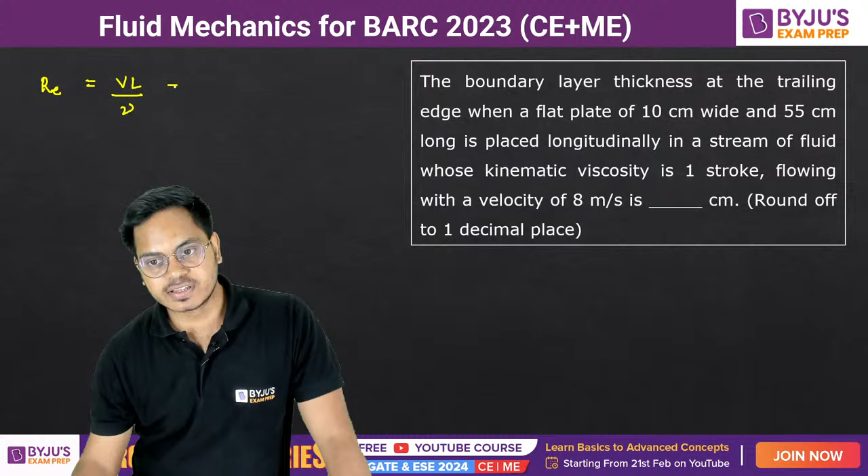It is going to be the velocity into length by kinematic viscosity. Everything is given to us. Velocity is 8 meter per second. Length of the plate is given to us and it is 55 centimeter, so 0.55 divided by kinematic viscosity, which is given to us as 1 stokes. 1 stokes means 10 raised to the power minus 4.

Now when you solve this, the Reynolds number value - ek baar aap mujhe comment box mein bata bhi sakte hain, otherwise I'll tell you it is 4.4 into 10 raised to the power 4. So this is the Reynolds number value. Achha, whether it is greater than or less than the critical Reynolds number. What is critical Reynolds number? Critical Reynolds number is 5 into 10 raised to the power 5. Definitely it is less than that. So we have a laminar boundary layer.

Good evening, Kiran. Now we know that for boundary layer, Blasius has given us the solution, that is delta by x is equals to 5 or 4.9, given in different books. Okay, in different books it is given different, no problem. Let's put the value here.

So delta is going to be 5 into x, which is nothing but 0.55. Put the value here as 0.55 divided by under root of the Reynolds number you calculated, that is 4.4 into 10 raised to the power 4. Put the value 4.4 into 10 raised to the power 4. When you calculate this, how much is the value of delta you guys are getting?

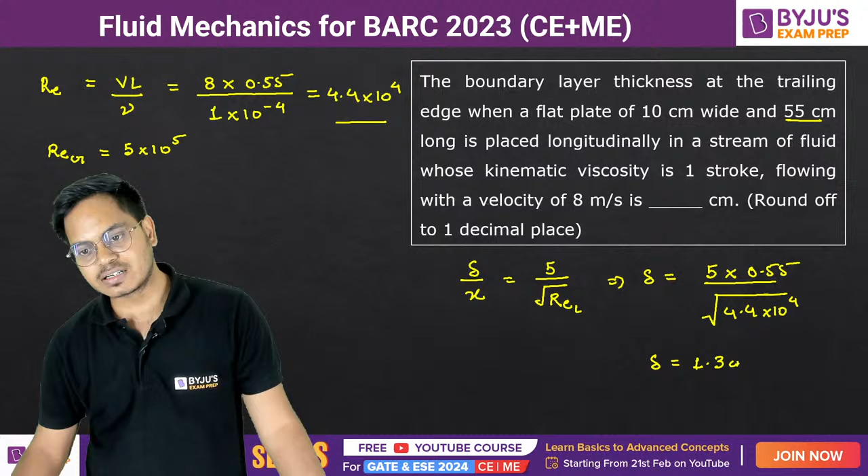Next question: the flow rate of water through the pipe in a fully developed flow through a pipe of diameter 160 mm, where the shear at wall is 78 Newton per meter square, is how much? They are asking us the discharge.

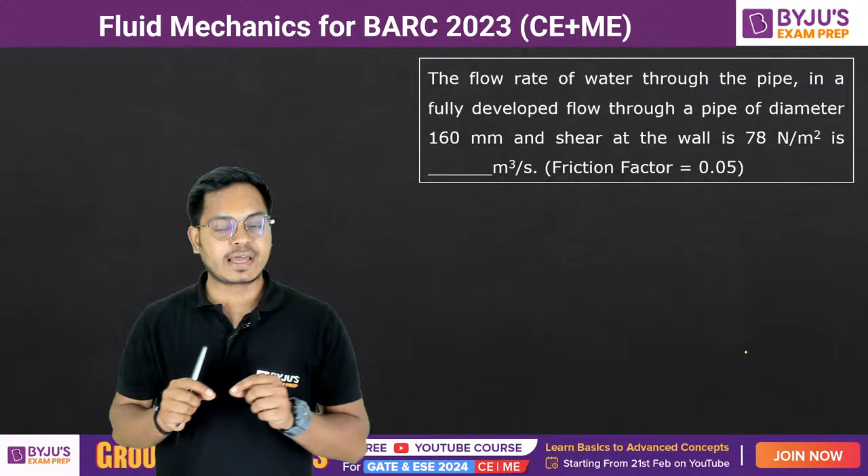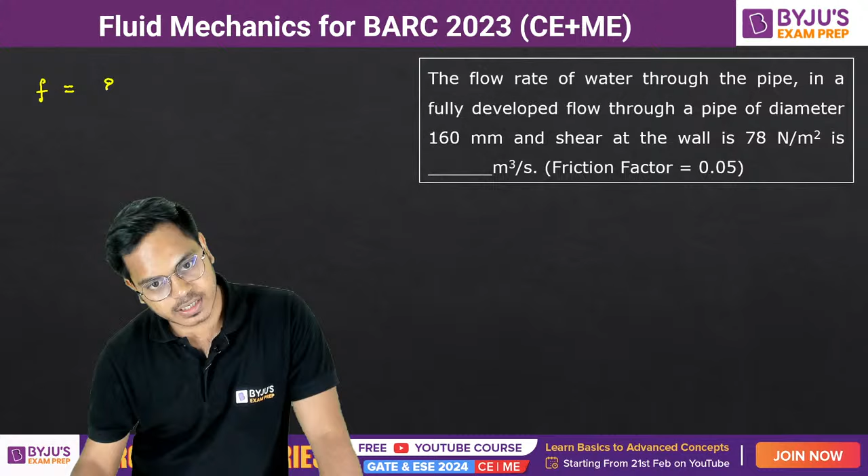So do I have anything, and friction factor is also given to me. Do I have any relationship between friction factor, velocity, and shear stress, that is shear at wall? Remember, there's a relationship I have discussed in classes a lot: friction factor equals 8 times wall shear divided by rho v square.

So from here we can find out the velocity. We have diameter, velocity, and discharge we can get. Let's find out the velocity from here, guys. So velocity is going to be 8 tau w by rho f, under root.

Kindly put the values here, see what you are getting. So 8 into 78. Density, what is it? This is water, so 1000. F is 0.05. How much is the velocity? Has anyone found it yet?

How much is the velocity, guys? Is it 3.532 meter per second? Super, once you have got the velocity...

Now we are good to go to find out the discharge. Discharge is nothing but area, cross-sectional area into velocity. Area is going to be pi by 4 d square. Dia is 160 mm, so 0.16 meter. Pi by 4 d square into velocity 3.532.

When you put the value, how much is the discharge? Who will tell me, Kiran? Tell me quickly, everybody answer. 0.071 meter cube per second. And what if they would have asked the same thing in liters?

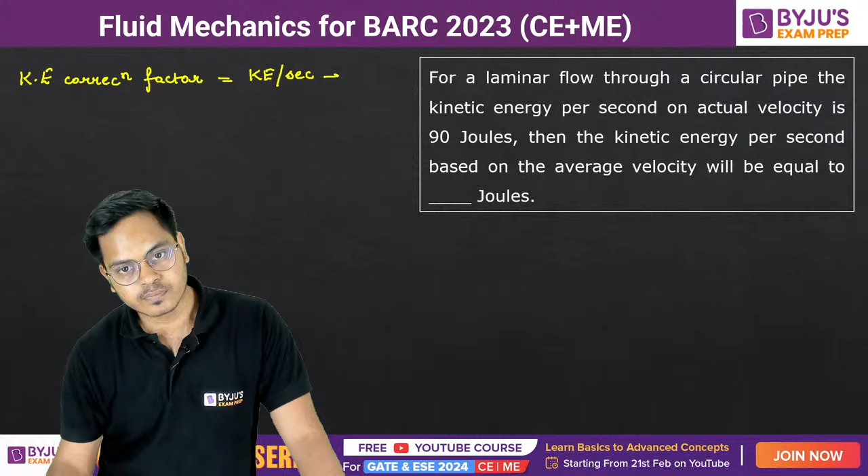So kinetic energy factor is how much for laminar flow, guys? That is going to be 2, equals to how much for actual velocity given? 90. And they're asking you this: kinetic energy per second corresponding to average velocity. So it is going to be 90 by 2, and that is 45 joules.

You guys are super. Anand, very good, brilliant. Right answer is 45 joules. Next question for you guys.

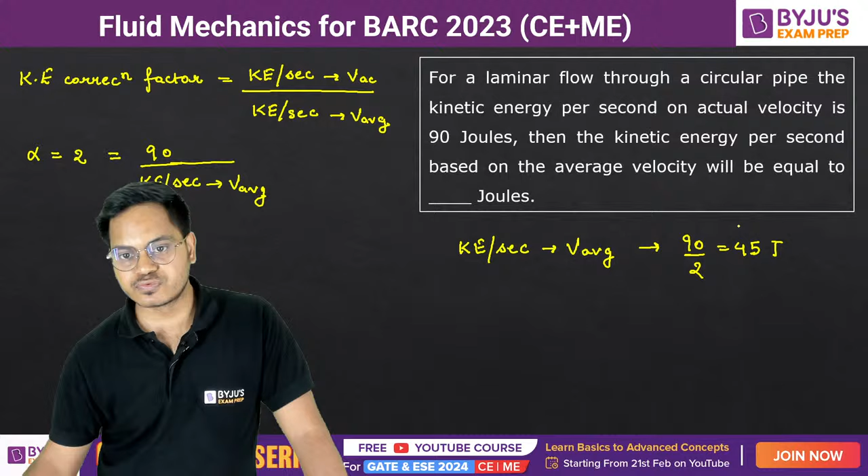Super question for super students Shekhar, Kiran, very good, keep answering. A viscous fluid was flowing in a laminar regime in a 6 centimeter diameter circular pipe. If a pitot tube at a radial distance of 2 centimeter from the inner surface of the pipe indicates a velocity of 6 centimeter per second, then maximum velocity is how much?

This is the case of a flow through pipe, and that too laminar - they said the viscous fluid is flowing in a laminar regime. In the first line itself they have cleared what the situation is here. Please answer - they are asking for maximum velocity.

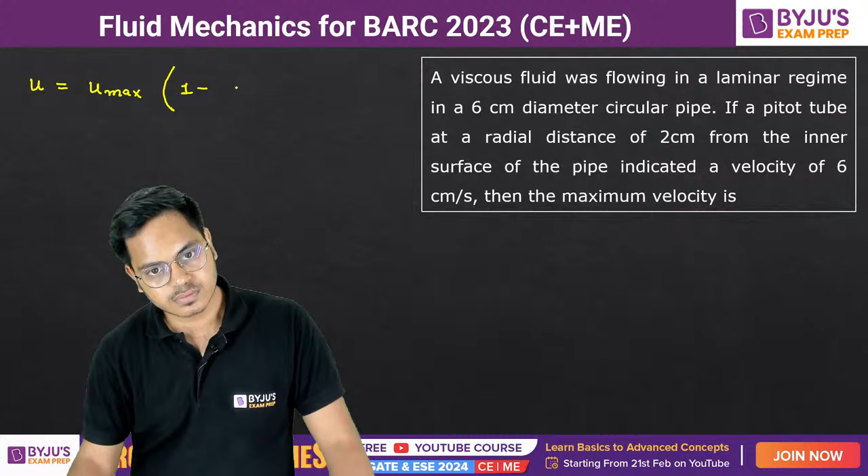Small r is the distance, radial distance from the center line, and capital R is the radius of the pipe, right? So now what is the value given? Radial distance 2 centimeter, at radial distance 2 centimeter from inner surface. So what is the value of small r?

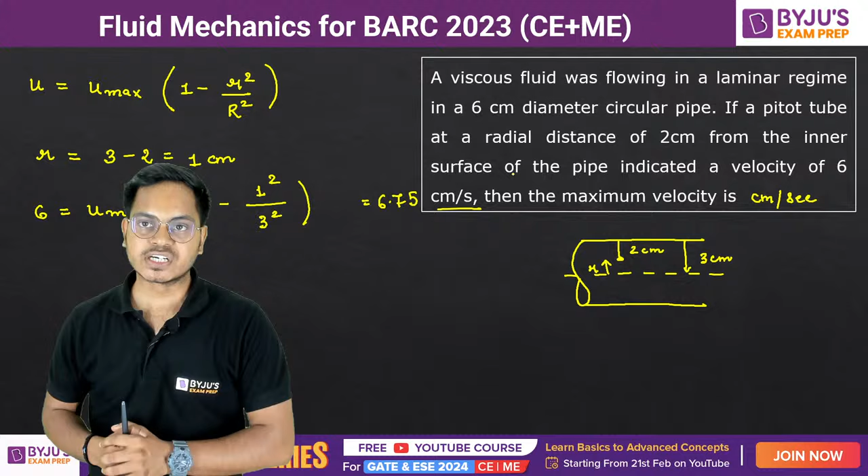Velocity at distance 1 mm from boundary. They have told you that separation is 4 mm. Center line velocity is given, means maximum velocity is given to you. What else do you need? Everything is with you.

If anyone doesn't remember the equation, I can help you. It was u equals minus 1 by 2 mu, del p by del x, and then hy minus y square. H is the thickness between the parallel plates and y is the distance from the surface.

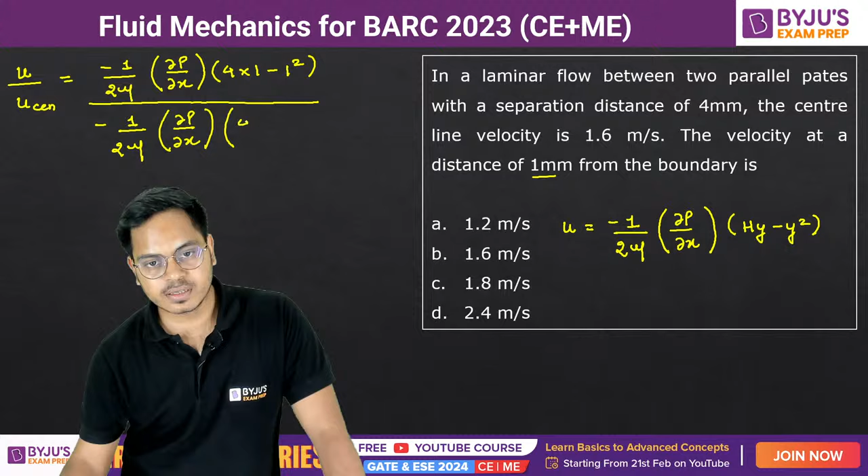Where they are asking 1 mm from the boundary, right? H we already know, H is how much? 4. So 4 into 1 minus 1 square divided by minus 1 by 2 mu. Center line, so we know it is how much, del p by del x. This would be 4 only, but here this time it will be 2 minus 2 square.

But remember guys, everything we have considered in mm, then we need to convert this also in terms of meter, because meter per second is what we are looking for, right? Either do that or anyway it will be cancelled out, so it's the same thing either way. This velocity is given to us, so it is U by how much? 1.6 equals to, everything will be cancelled out, cancel out, cancel out. This will be 4 minus 1, 3, and this will be 8 minus 4, that's 4 only.

So from here, the value of U is how much? Now let's see who is going to answer this quickly, everybody. Directly you can answer now without even solving it. Very good, superb, and that is 1.2 meter per second. Very well, very well, very well.

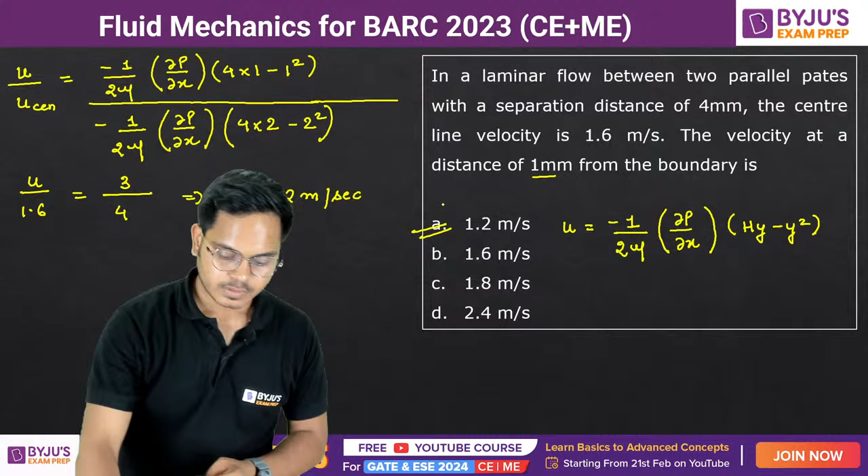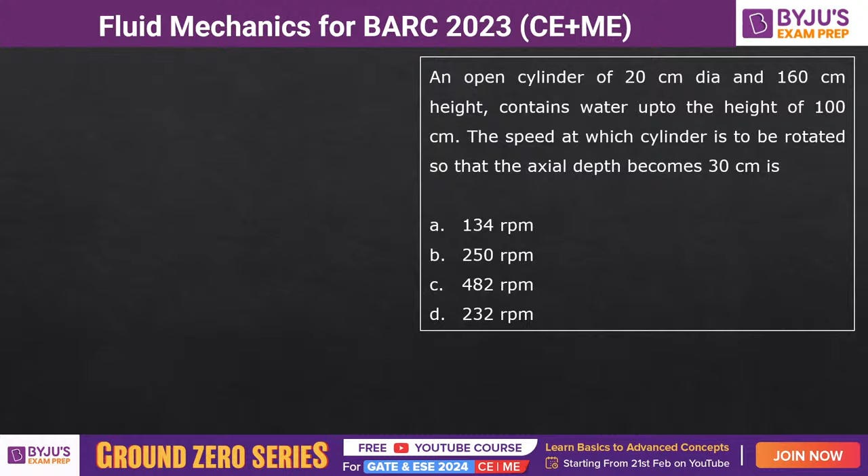Moving on to the next question now. The question is very beautiful and very simple and very important as well. An open cylinder of 20 centimeter diameter and 160 centimeter height contains water up to height of 100 centimeter. Okay, I'll make the diagram for you, or you do one thing, give it a shot, you guys do it quickly. All right, open cylinder is 20 centimeter diameter.

Okay, 20 centimeter is the diameter and 160 is the height. Water up to 100 centimeter. The speed at which it rotates so that axial depth becomes 30 centimeter. So this becomes 30 centimeter. Okay, we need to find out this, very easy thing.

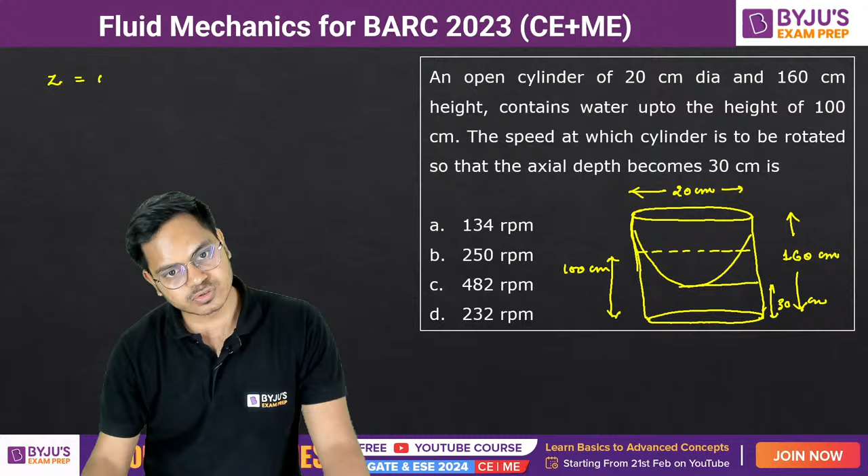We know the relationship that Z equals omega square R square by 2G. Now, omega we want, right? Omega means once we get the value of RPM also. Radius we have, that is 10 centimeter. Z, how much would be the value of Z, everyone?

Tell me. See, how much distance do we have here? 100 centimeter, correct? 100 centimeter was here, and how much is left over here? 60, right? So if it wants to leave only 30 centimeter here, means 70 must have come down, and 70 also must have gone up, right? So water will be till here only, up to the top.

Okay, so now the value would be very simple to find. 160 minus 30 by 100, because I want it in meter. Omega square, R is how much? R is 0.1 square by 2 into 9.81. From here, the value of omega is how much? Can someone give me the value of omega once? 50.50 radian per second. Very well.

Once we have omega, we know omega equals 2 pi N by 60. Put the values, and the value of N would be around 482.24 RPM. So C is the right answer. Here one question's answer went wrong, no issue. Next question.

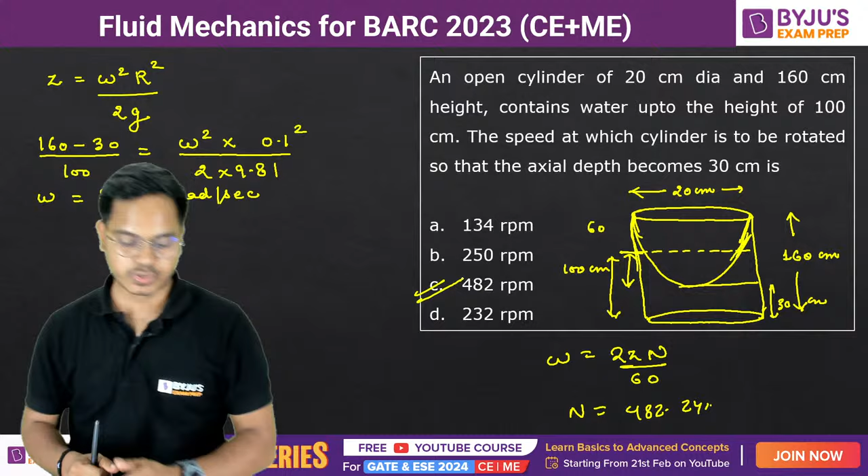Okay, given that atmospheric pressure head is 9 meter, vapor pressure head is 1 meter, failure head is 40 meter, cavitation coefficient is 0.15, Thoma's cavitation factor also you can say. The height at which the turbine can be set above the tail race level is what? Please answer.

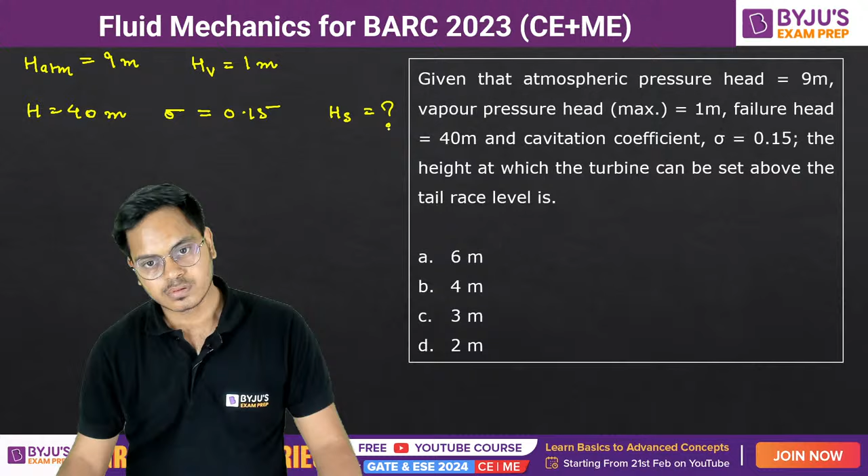Atmospheric pressure head HATM is given. Vapor pressure head given. Failure head is also given. Thoma cavitation is given. How much is this value? That's what they're asking. See, this is your atmospheric pressure head minus vapor pressure minus this,

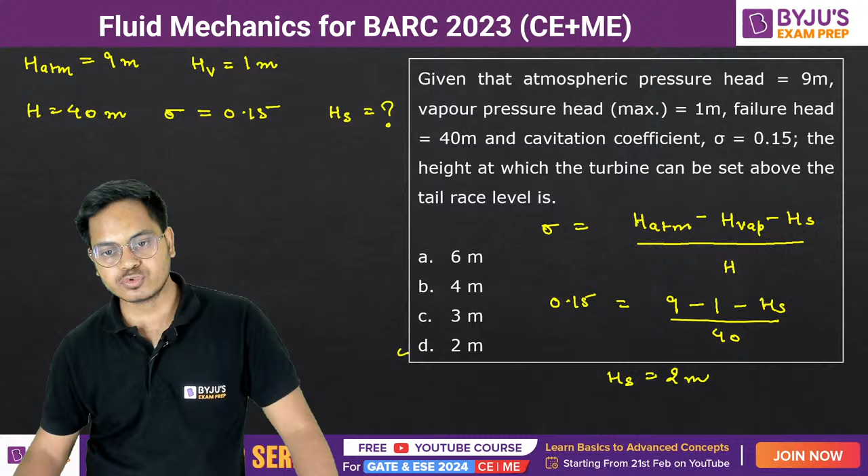divided by failure head. It is given to us as 0.15, ATM is 9 minus 1 minus the value I need, by 40. When you solve this, HS is how much? Can you quickly do the calculation and tell me, everybody? It must be 2 meter, which is option D. Set everybody? What happened? Don't let laziness come in, exam isn't far, right?

Next question. Next question says a laminar fluid flow of viscosity 0.8 Newton second per meter square and specific gravity 1.3, okay, if flowing through a circular pipe of this diameter, pressure gradient is given, average velocity is how much? Please answer.

See, we can use one relationship because this is flow through pipe, right? We know that average velocity is half of maximum velocity, correct? And what is maximum velocity? Half of this. I have already written, I think, somewhere, before, in this session only, before this particular concept: 1 by 4 mu, del P by del X into R square.

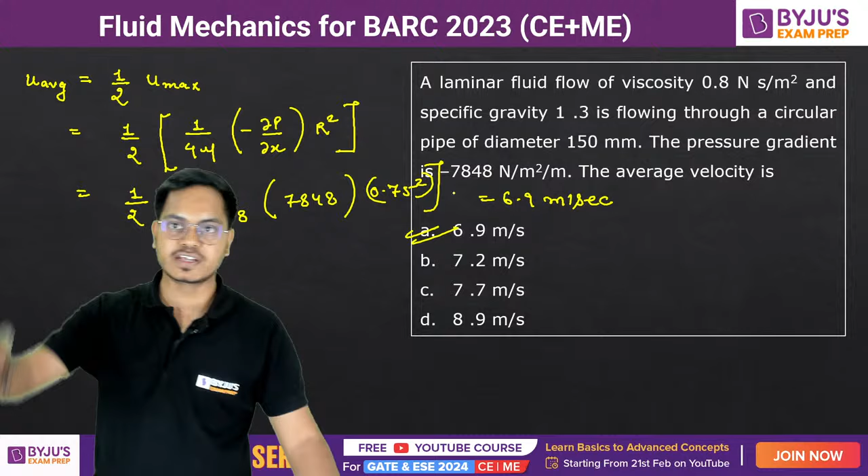Come on, put the values. 1 by 2, 1 by 4 into 0.8. This is given as 7848. And R is how much? 150, 75, 75 square. So when you solve this, the average velocity comes out to be 6.9 meter per second, which is option A. Very good, Kiran. Very good, come back, very good.

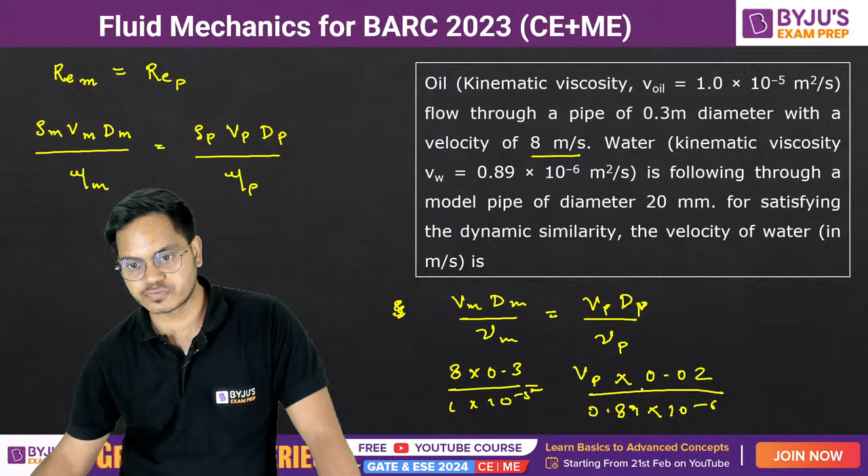Now put the values. V is given to you as 8. So 8 into this is given as 0.3. Kinematic viscosity 1 into 10 to the power minus 5. And here we need velocity. dp is given as 0.02 and kinematic viscosity 0.89 into 10 to the power minus 6. From here, the velocity that we should get is 10.68. I have done the calculation already. Very good, yaar. Anand, superb, yaar, superb.

Next question, please try to answer this. It's a very easy question.

Please answer, everyone. In a sample of water, a pressure increase of 15 into 10^6 Pascal caused a 2% reduction in its volume. What is the velocity of pressure wave in this water? Tell me, velocity of the pressure wave.

Basically this is what I need: C equals root of K by rho. Now for that we want K. How will K come? You can see - you have pressure increase, you have percentage reduction in volume. So we know that bulk modulus equals increase in pressure by volumetric strain.

Right, so we can use it. It is going to be minus 15 into 10 raised to power 6 divided by the volumetric strain, which is 2 by 100. From here we get the value as 750 into 10 raised to power 6 Newton per meter square.

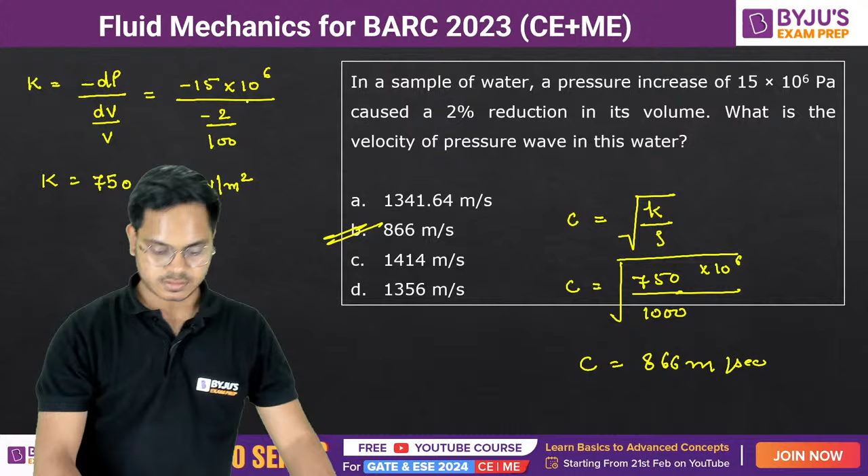Superb, next question - I think this is the last question, but best question I would say from today's class. A square tank 1 by 1 of depth 1 meter has a square hole of size 1 centimeter by 1 centimeter at the middle of its bottom with a valve. How much time in minutes will it take for the tank to go from full to empty once the valve is opened? Coefficient of discharge is 0.68.

Try to answer please. This is 1, this is 1, right, and it is opened from here. Try to answer this.

You know that area of tank is how much? Area of tank is 1 by 1, that is 1 meter square, and area of the hole is 1 into 1, that is 1 centimeter square, or 10 raised to power minus 4 meter square. Now discharge, we know that discharge can be given as CD into A under root 2GH.

Correct? Now the point is H is changing with respect to time, right? H is changing with respect to time. We should use dt by... where, in the previous case here you are saying gradual closure, or you are asking a general doubt here, because things are entirely different, right?

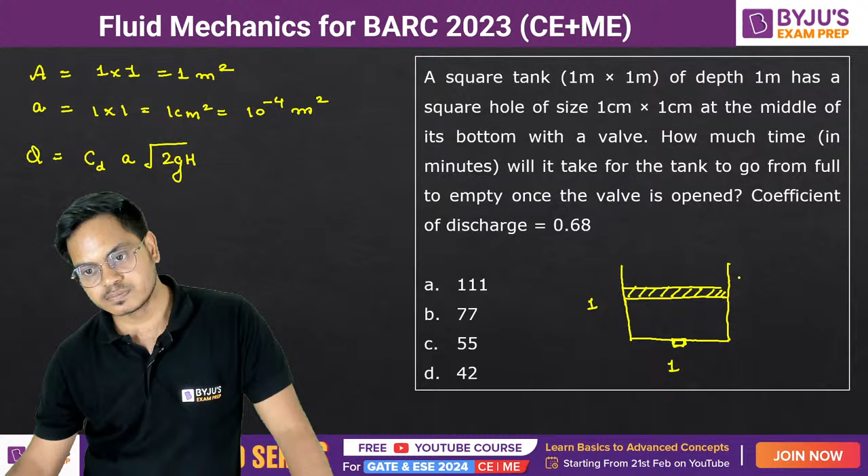So guys, because the H value is changing, keep on changing, let's see how we can deal with this. What we can do is we can take a strip over here. Let's say the thickness of the strip is dH. Now we know that change in volume - this is beautiful, please see this. Change in volume, I'll disappear myself so that you can see what I'm writing.

Change in volume can be given as discharge into dt time. Correct, that's the change in volume. And this happened equal to what? In dt time, this much change in head came. So you are saying that it is A into dH. Correct or not? If you agree with this, please send me a heart sign or write CC in the comment box, everybody.

Right, so from here we can say that dt equals minus A dH divided by, instead of discharge, you can put the value of this thing, CD into A under root 2GH. Now we are good to go. If we integrate this, take constants outside - area is constant, CD constant, A constant, 2G constant. Rest, we have to see the limit 0 to 1, dH by under root H.

Now all you need to do is put the values and solve it. When you solve it guys, what you are going to get is, let me tell you, 6633.41 seconds. And it is nothing but 110.56 minutes.

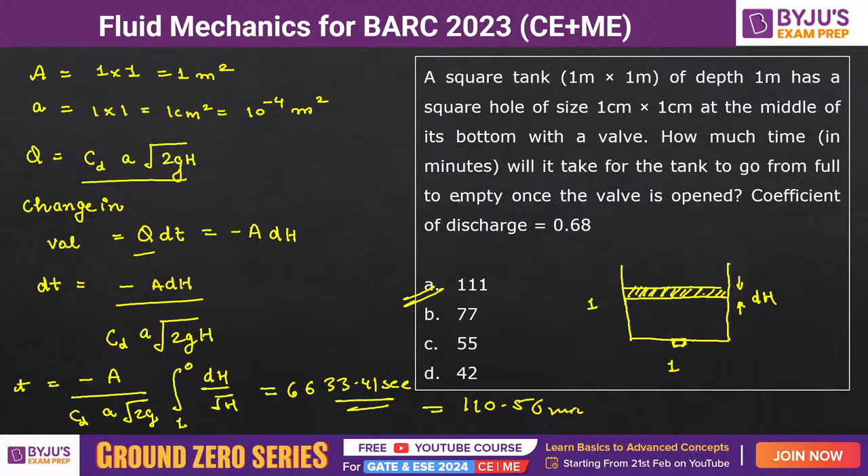Who gave the answer first? Very good, very good, Anand has given it. Very good. Yes Kiran, that's what we are doing. So this is the solution for this.